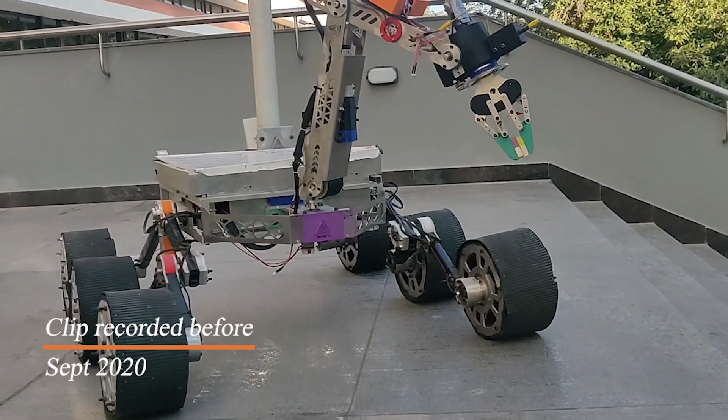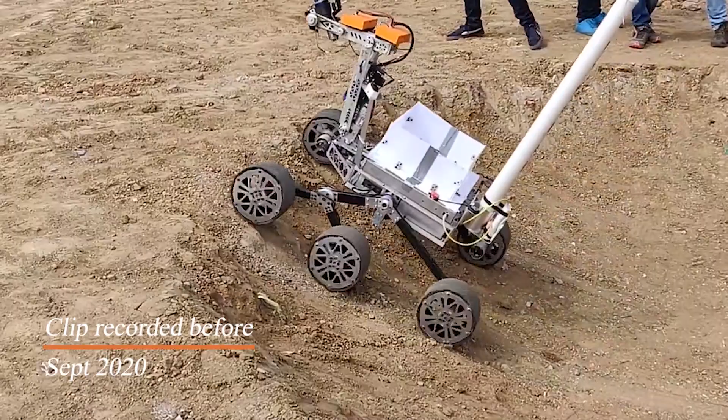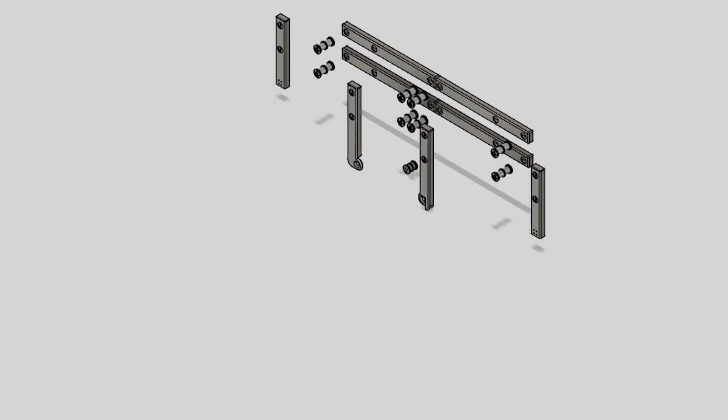The mechanical module began design from scratch. We aimed to explore parameters we had not considered previously. For the traversal system, we explored various designs and took particular interest in the CRAB mechanism. We also considered optimization parameters such as forward-backward symmetry of the traversal system. However, after analyzing the data, we decided to continue with the rocker bogie mechanism, with the rocker and bogie links being made of custom fabricated carbon fiber.

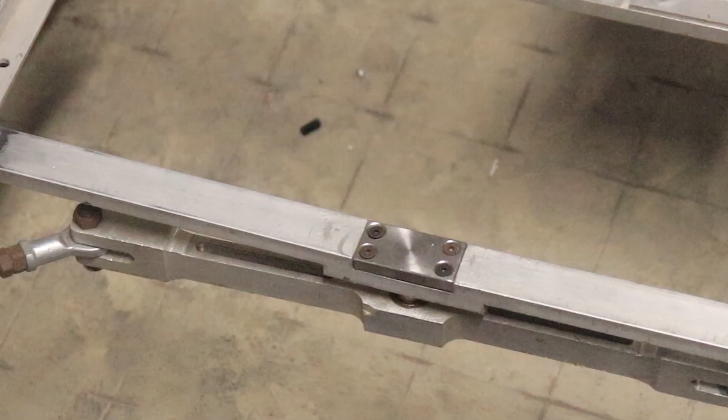We are using balloon wheels this year with modifications made to increase traction. The bar differential was also redesigned with the goal to eliminate play, and the whole system was fine-tuned.

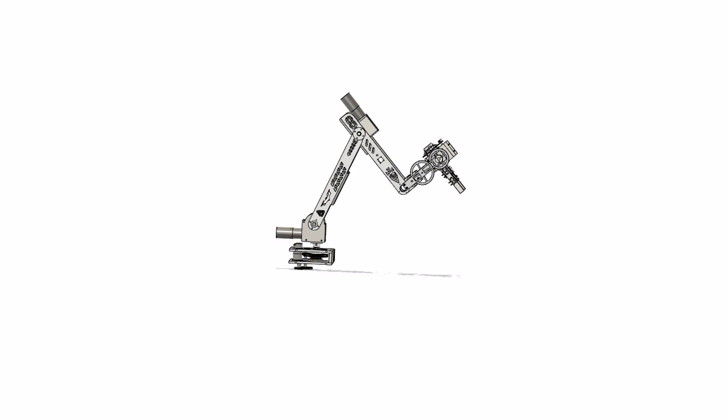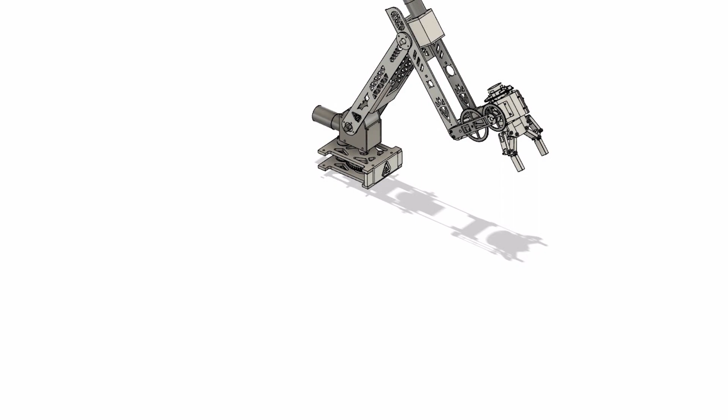Our 5 degree of freedom articulated manipulator is robust and capable of performing a variety of tasks. Each joint is non-backdrivable and actuated independently. The elbow joint mechanism is now replaced with a worm gear set. A newly designed gear train mechanism is implemented for the base rotation. Orientation of motor mounts are changed to allow free arm movement. The end effector is an underactuated 5-bar mechanism with both encompassing and pinching grips.

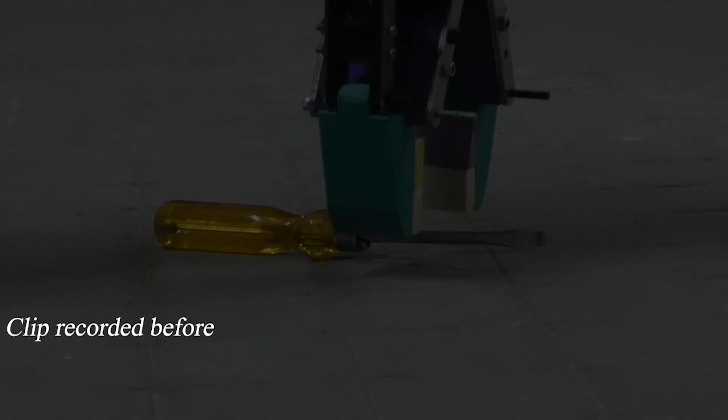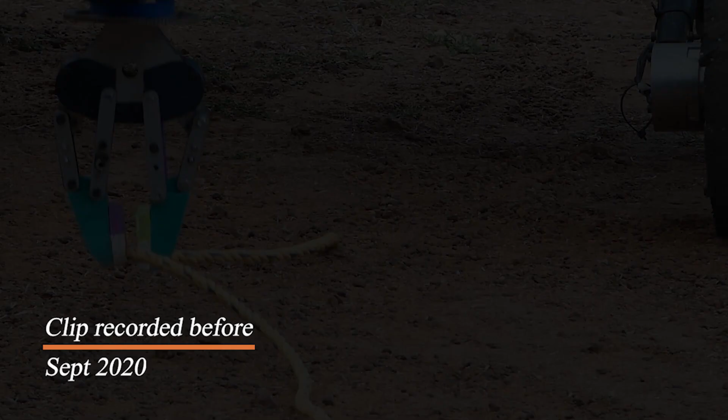To compensate for the extra degree of freedom, we have repositioned the spring. Now it puts load on the motor only when the object is encompassed. Orientation of the gripper body is changed to allow easy grasping of objects situated above the rover. The complete re-engineering process helped us increase the workspace and reduce undesirable vibrations that make control difficult. We are also implementing inverse kinematics for the arm for its precise functioning.

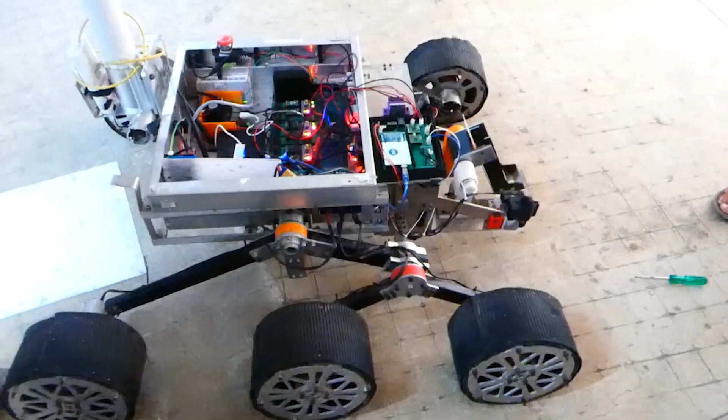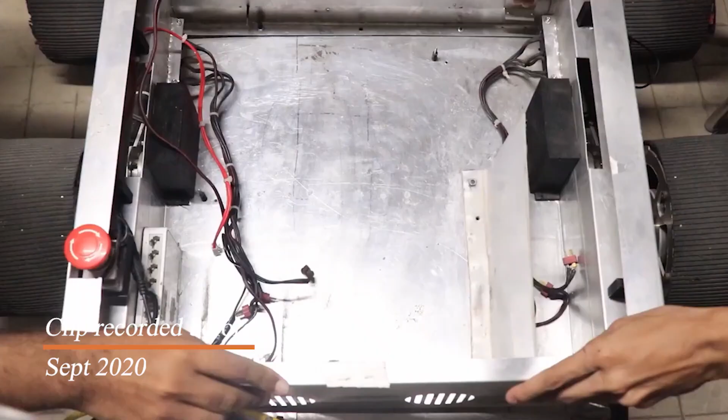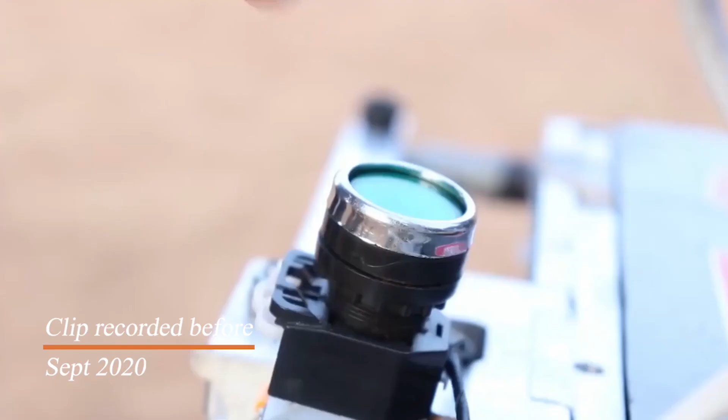Our electronic subsystem consists of an NVIDIA Jetson Nano as the main computer and two networks of STM32 microcontrollers connected over CAN and I2C. The CAN bus was chosen for its high reliability and noise resistance. The electronics box houses all the electronic components of the rover, including the Nano and two 24-volt LiPo batteries, which support rover operations for over 3 hours. A relay-based power distribution board is used, which is incorporated with a kill switch. The PCBs were custom designed to enable modularity in operations for easy assembly and debugging.

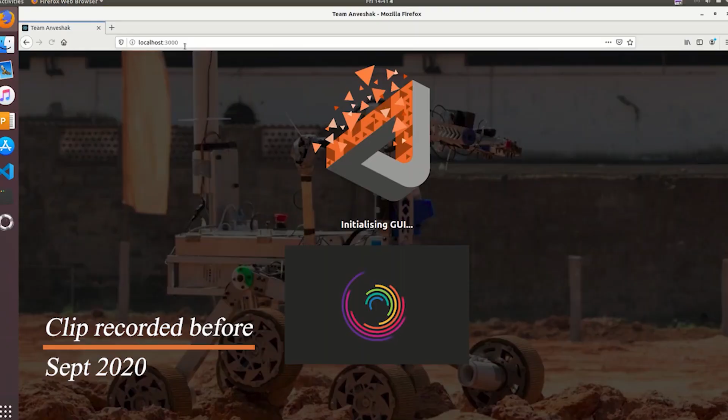Our communication setup consists of a directional antenna at the base station and an omnidirectional antenna mounted on the rover, operating at 2.4 GHz. It is capable of communicating over a distance of 1 km even in the absence of line of sight. To provide real-time view of the rover's environment, 4 cameras are placed at optimum positions, and the orientation of the main camera can be dynamically controlled. A custom web-based GUI is used to set up, monitor and debug the rover easily. Information regarding position, velocity and functioning of the rover are all accessed centrally in the GUI.

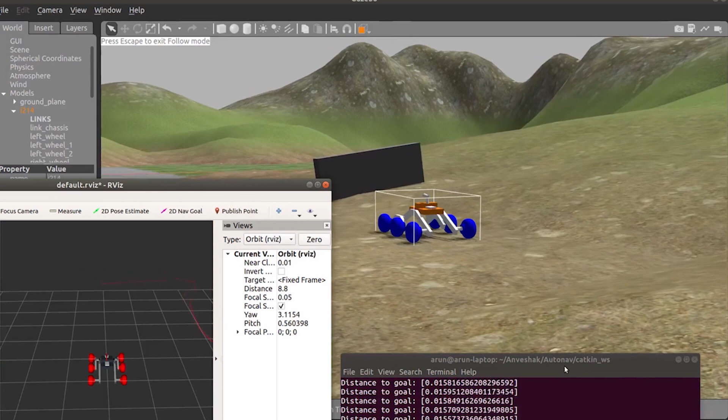For the autonomous task to successfully navigate to the destination location, a control algorithm based on PID control has been implemented, which makes use of data from a GPS and an IMU sensor. To avoid any obstacles in the way, the combined data from a stereo camera and LiDAR is fed to the vector field histogram algorithm, which generates a 2D grid of obstacle probabilities.

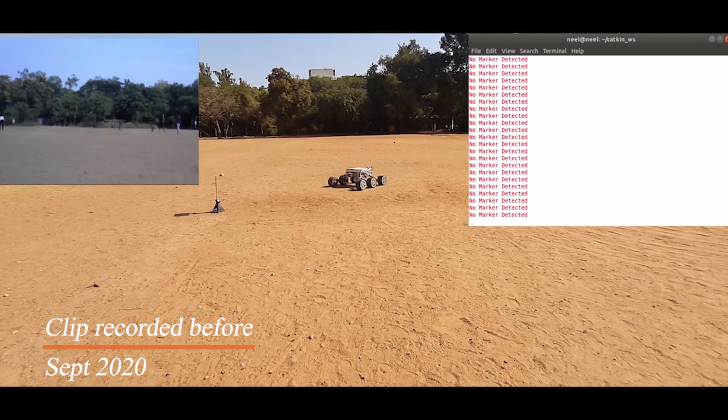On reaching the destination location, a spiral search pattern helps to increase the search distance by a radius of 10 meters without compromising time efficiency. The ROS wrapper of ALVAR is used for marker detection. A combination of 3D pose estimation and multi-marker detection is used to identify the gate and pass through it.

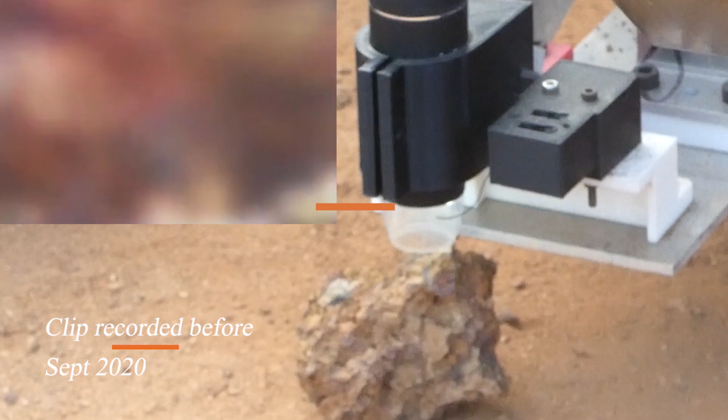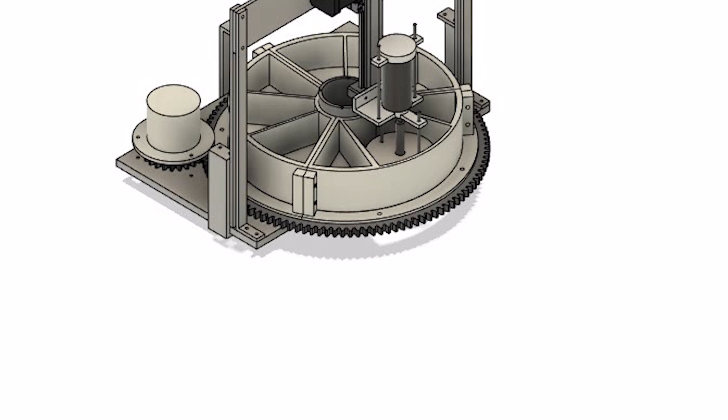The science setup has been divided into two parts, the soil collection mechanism and the onboard laboratory. This year's rover uses an auger coupled with a rack and pinion mechanism to collect soil in order to ensure precise distribution of the samples. The auger digs into the soil, which is then stored in a cup before being dropped into the laboratory for further analysis.

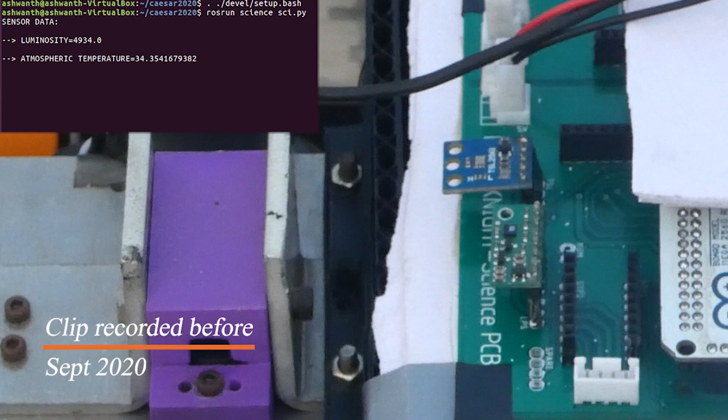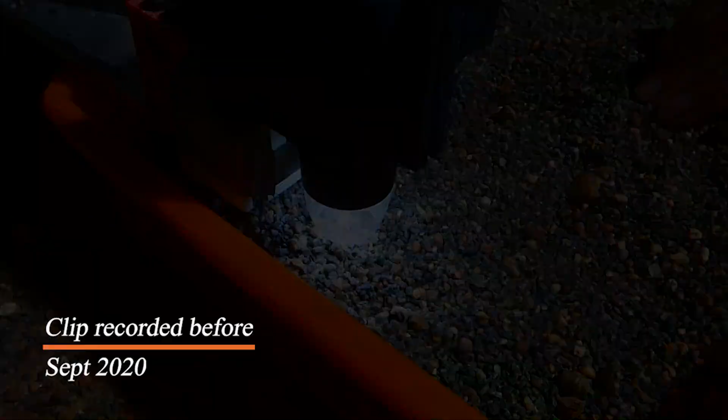Onboard sensors measure atmospheric and subsurface conditions like temperature, pressure, and luminosity. A microscope with adjustable focus is used to observe the physical attributes of the soil and rocks and fossils of extinct organisms. Using these properties, the physical and atmospheric conditions that led to the formation of rocks can be predicted using a database.

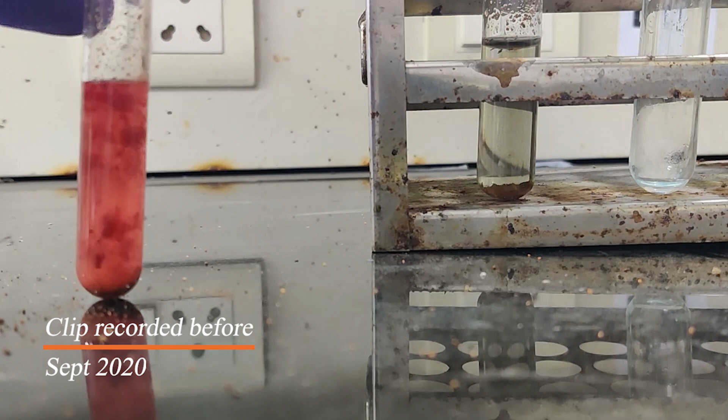Our life detection strategy tests for biosignatures like lipids and proteins, among others, to differentiate between samples with extinct, extant, and no life. The preservation potentials of these biosignatures allow us to further estimate how long ago life was present in the sample.